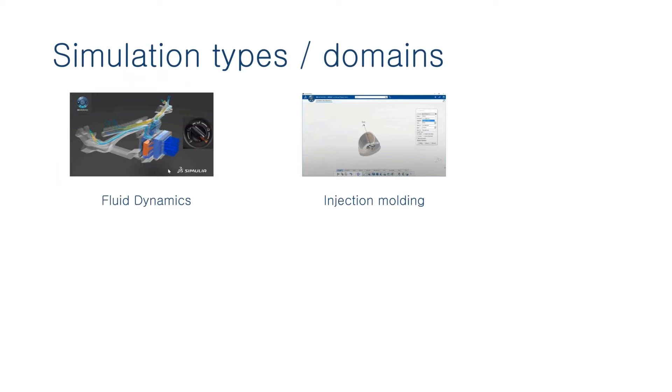We have fluid dynamics. When we want to have access to our fluid flow, we need to know pressures, velocity of the fluid, thermal effects. We have as well injection molding. In this case, instead of analyzing the product, we're analyzing the manufacturing process. In this injection molding, we are able to analyze the fill stage, packing, warping, and the mold cooling side of things.

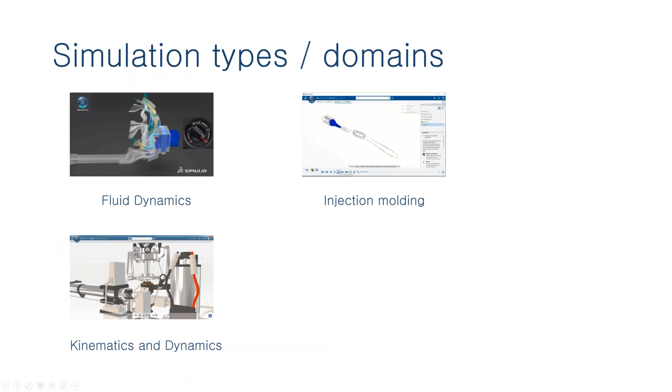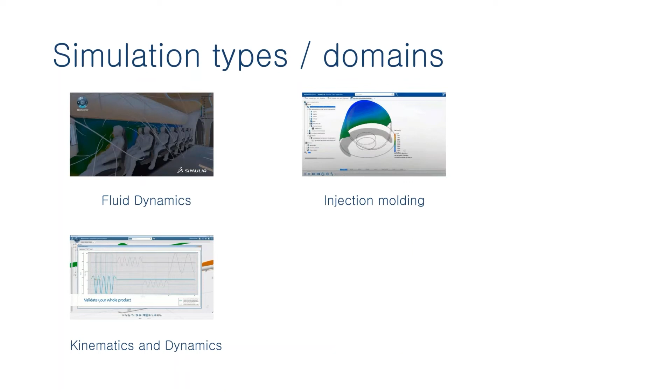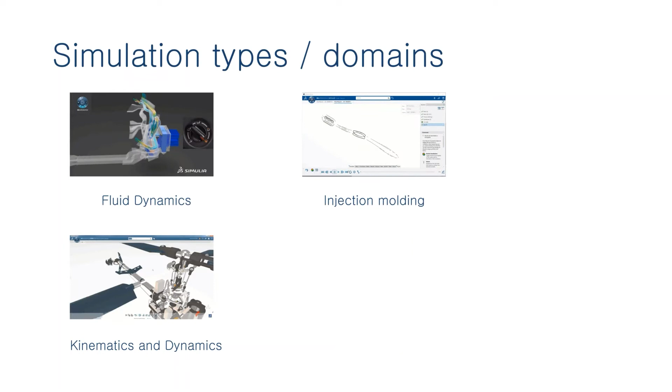For some other people, simulation may mean kinematics and dynamics of rigid bodies. So when you're looking at adding some kind of motors, you have products that have a lot of movement, and you need to analyze that. Kinematics will take a look at the velocity, acceleration, displacement of those rigid bodies, and then dynamics will add to that forces and pressures based on that movement.

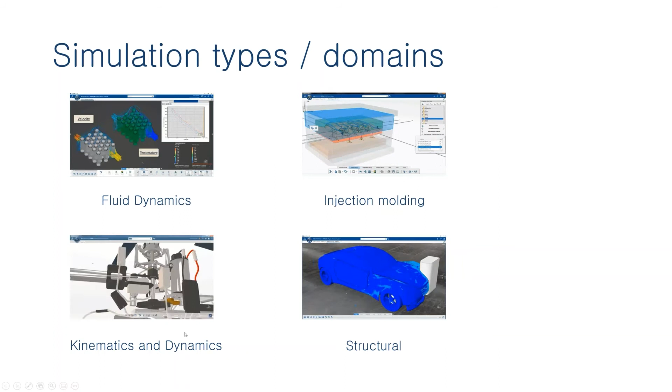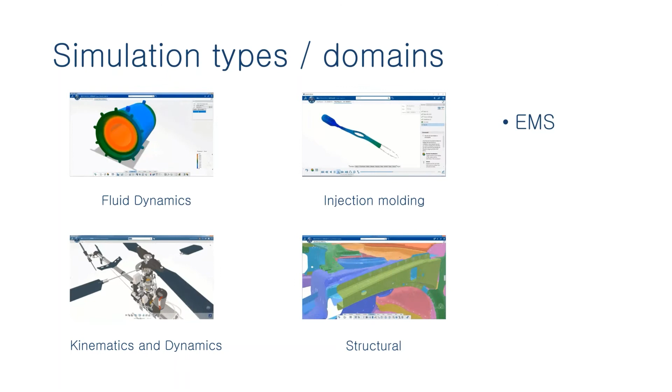And then we also have the structural. The structural is when we're looking at the stresses, the strains, deflections, the fatigue, drop test, all of these types of analysis, we put them under the structural vertical. And then on top of that, a simulation may mean more for other people. So for example, electromagnetic simulation, when we need to know a magnetic field, an electric field, based on a current.

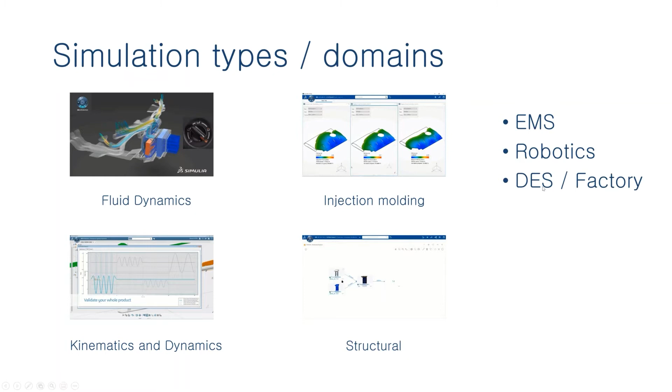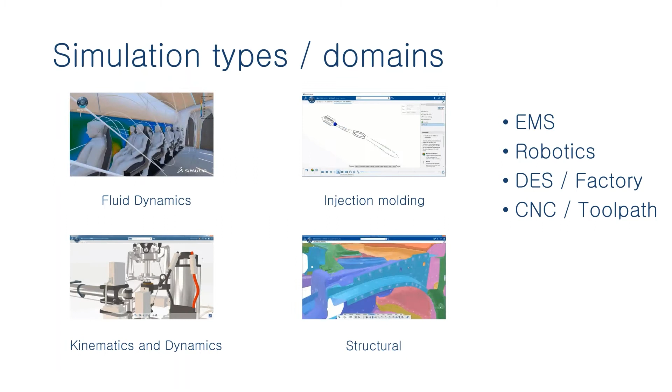We can do that. For some other people, robotic simulation is what they need to get out of the solution tools that they have. Discrete event simulation and factory simulation as well. We have CNC and tool path and optimization of those type of things that may be considered by some other people as simulation as well. We have virtual reality and augmented reality. Again, some people will consider that as simulation.

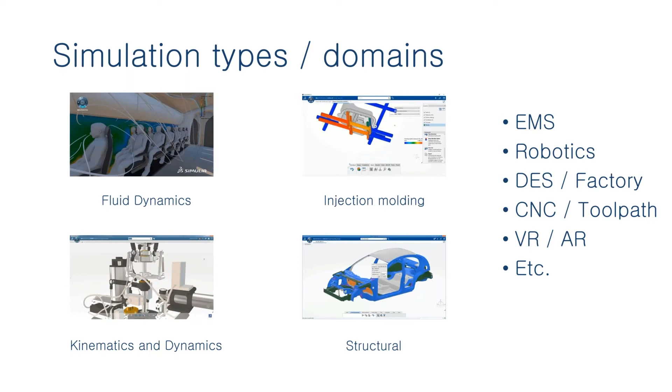And then there are a lot of other products. We within CAD Micro, within the partnerships that we have, have solutions for all of these products. And a lot of these solutions are within the 3D Experience platform. There are also solutions in our installed SOLIDWORKS platform, as well as some other partner products that we partner with. But today we're going to be talking about the structural.

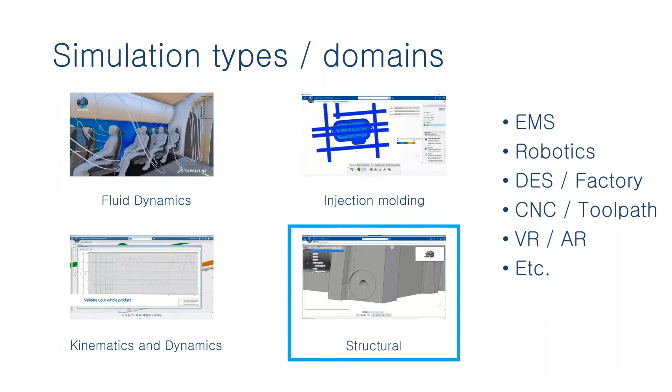Structural is probably what people think about when people talk about simulation. The structural domain, the structural vertical, is probably the first thing that comes to mind. We're going to be talking about the structural because it's not only the most common one that people would do, sometimes it is the first type of simulation that people get into,

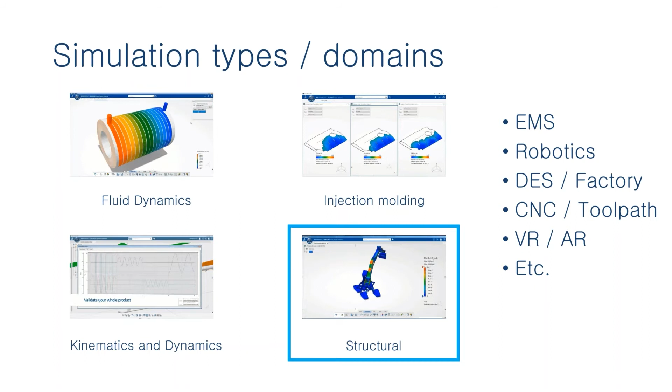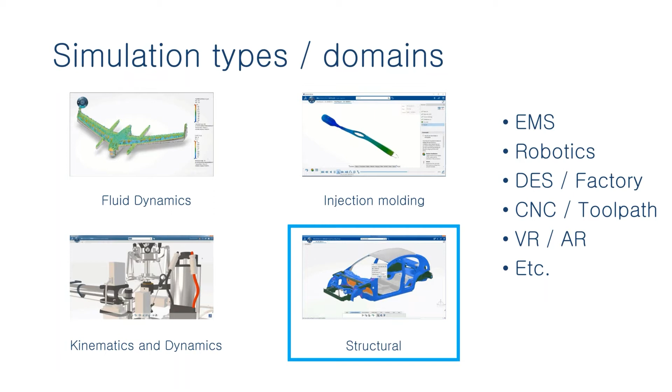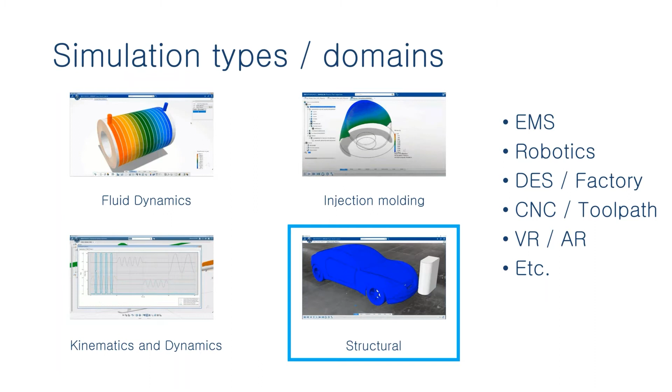but also because a lot of the things that I'm going to be talking about related to the structural simulation, like meshing, like collaboration within SOLIDWORKS and the 3D Experience platform, would apply to these other domains. So for today, I'm going to be concentrating on structural. If I'm talking about things that we cannot do, it's just within the structural domain, but chances are we can do it within the different domains that we have.

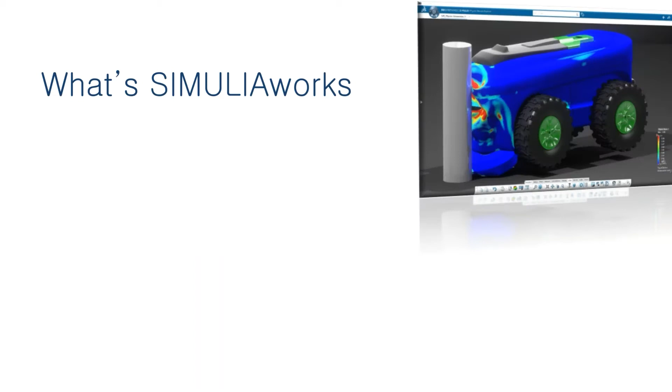So that is the simulation that we're going to be talking about: structural. And now we're going to look at what SIMULIAworks is and how it is going to help me within that structural vertical. So SIMULIAworks is a brand, and it's a brand that contains a portfolio of simulation products. There are several characteristics common throughout them. The three that I want to highlight today are that it is a SOLIDWORKS connected product.

It doesn't require you to have SOLIDWORKS, but based on the poll that we did when people were subscribing to this webinar, based on our customer base and the people that are joining today, most of you do have SOLIDWORKS. So I'm going to concentrate today on SOLIDWORKS, not because it's the only workflow that we have, but it's the one that I am more familiar with, and our audience is more familiar with. So this SOLIDWORKS connection is very important.

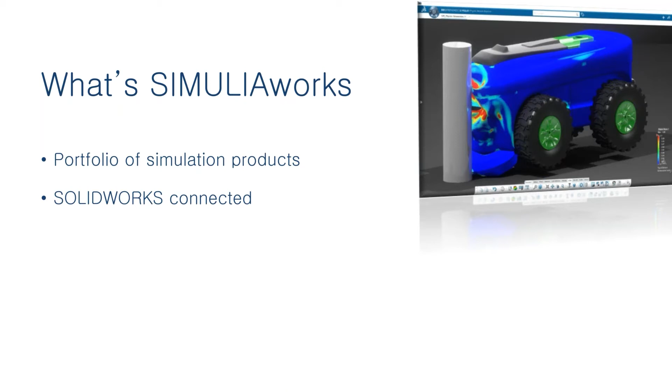There are other connections, like I said, you could have a connection with CATIA, a connection with Autodesk Inventor. You don't even have to have a CAD system to be able to use these. You could have a modeling system within the platform as well. But again, today we're going to highlight the SOLIDWORKS connected portion of it. We're also going to be talking about the collaboration within the 3D Experience.

Once we have this geometry in the 3D Experience, there is a big room of possibilities that we can leverage in that platform. There is data management, there is PLM, bill of materials, there are collaboration tools. The 3D Experience is a whole platform that will give us the different tools that can help with the process that we're working on.

And then the third characteristic that I want to highlight about the SIMULIAworks portfolio of products is the power that it has. It's such a powerful tool. It is powered by the Abaqus solvers, which are very well recognized in structural simulation. And when I'm talking about powered by Abaqus, I'm talking about the structural side of the SIMULIAworks brand. And this brings a lot of technology that is proven and recognized in the industry.

The first three items, the portfolio of products, the SOLIDWORKS connection, and the collaboration, I'm going to do a brief overview of them. We could have, and we will have, webinars on each of those subjects, but today I want to spend a little more time on the technical aspect of the FEA process, a little bit more in detail.

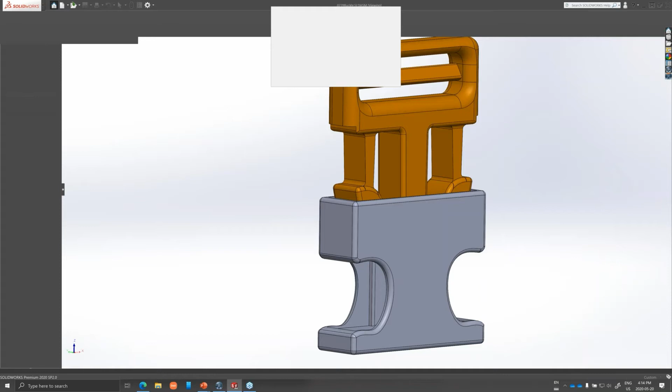So let me show you that actually in the interface. So I have SOLIDWORKS right here. I'm going to open an assembly. And let's say that the assembly that I'm going to open is this one. In this case, this is just a basic assembly, a couple of parts. You see here, this right now is on my desktop, in my local drive, and I want to move this to the platform.

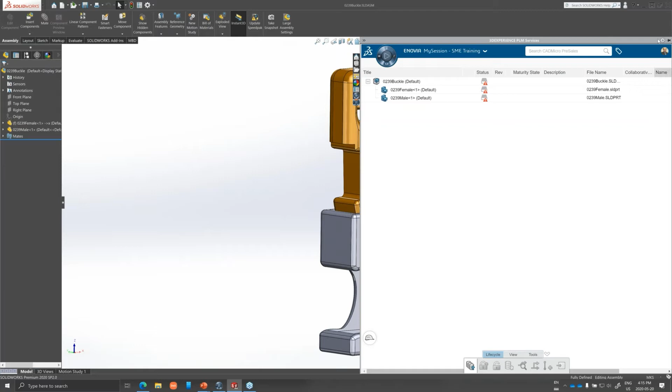So what I have here is an add-in that is called the PLM services add-in. And when I do that, similar to what we have in PDM, it would recognize that these files that I have are not added to PDM. They're not in my local view. This is what this warning is telling me. These files are not in my local view of the PLM services.

So when I click on this and I go to save, the first thing that it's going to do for me is create this type of work. And then you can see here that it already finds some of the files. I'm still going to go ahead and copy this into the platform. Let me just skip that and then add that to the platform. I had done this before, so let me just open this one. There you go.

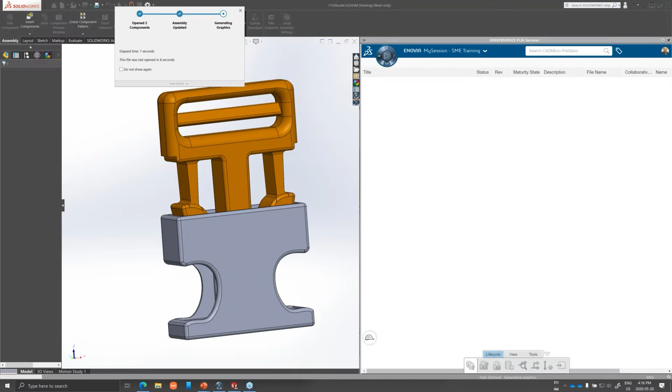Once we have it in here, you'll see that it'll recognize that I'm on that platform, and then I have similar functionality as PDM, or it is a PDM package. So if I want to work on this, I'm going to right click on that. I can reserve this. Once I reserve this, I'm going to be able to work on it. I have write access to it, and have general PDM functionality in here.

Now, within this tool, I can also link to some of those collaboration opportunities that we have within the 3DEXPERIENCE. So for example, in here, if I want to look at my change management, let's say that there were a series of issues that were tracked. This can be done in the platform, and then a change was issued, like an engineering change order was issued. I can take a look at those here. And to do that, I can look at my roles.

So if I click on my roles, I'm going to open an app called a change action. If I click on that action, you'll see it's loading the different work we have in those change actions. So here it's highlighting that this object is not attached to a change right now. But it says I have two change orders open for me. So I can use one of these change orders and track the changes I'm making to this geometry.

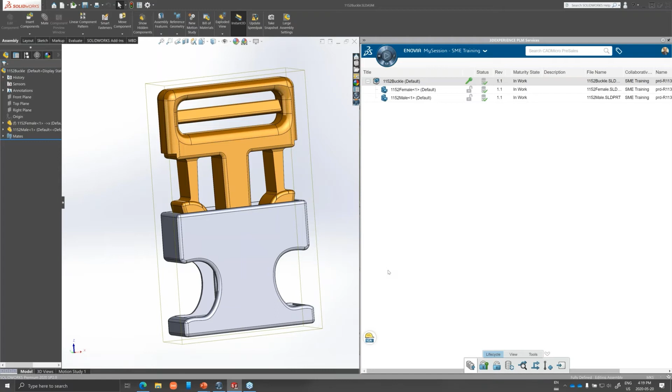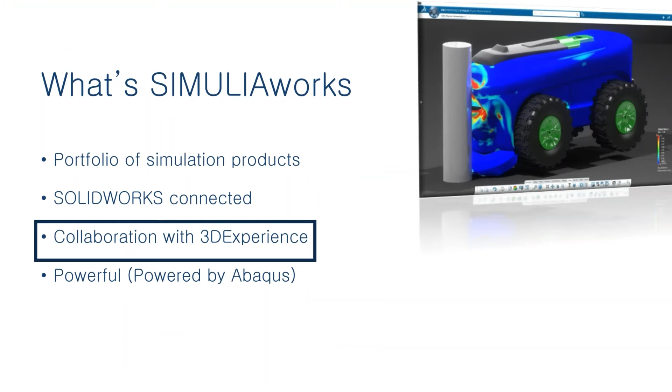So we've done this, and now we're going to go into the collaboration portion of it. You saw a little bit of that collaboration inside the SOLIDWORKS platform and interface, but we can also obviously do that in our web browser.

So right here I'm on a web browser. I'm connected and logged into the platform, and the way I'm organizing my information is based on what we call a dashboard. So I created a dashboard that contains the information relevant to me. And in here I have some bookmarks, which is a way of organizing the information and content that you have.

I also have a project planning app. I have, for example, a project that I created to plan this webinar. I have some tasks I need to do, some in progress, some done, and there's kind of a project planning functionality within the platform.

Then I also have a 3D space, which is kind of a set of files, all my information is in here. Think of it as a drive that we have, and I have access to all of that information in there.

And then I have here as well my issue management. So I have an issue that is tracked against a geometry and against a product, right? So there is issue management and issue tracking. And in this case, the scenario we're going to work on, there is an issue I've created that refers to a product, that buckle assembly we're going to analyze.

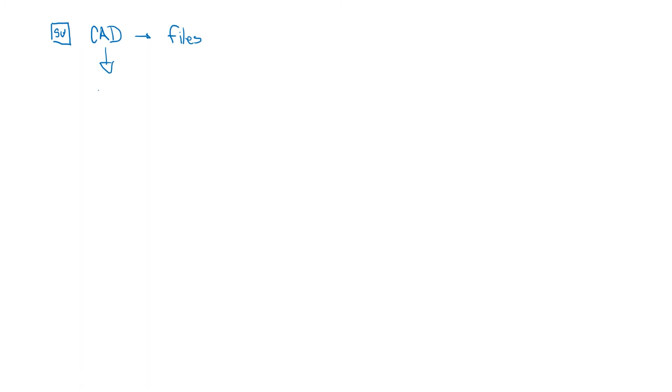It is a bunch of files, a file-based system. So we have that. Now, what I just did at the beginning of this presentation is that I uploaded that to the platform. To upload that to the platform, in that process, we end up with what is called a physical product. So that information stored in my files, in my local folder or in PDM or wherever it is, that information in the file format becomes what we call a physical product.

And this physical product is not a file, it's an object-based system. This object-based system is essentially just a record in a database, which makes it very flexible and very useful later on. But it is a 3D representation, a fully functional 3D representation.

Now I have that physical product. I can use that just to view, to annotate, to have my digital twin and do MBD type functionality. There's a whole set of tools that I have in there.

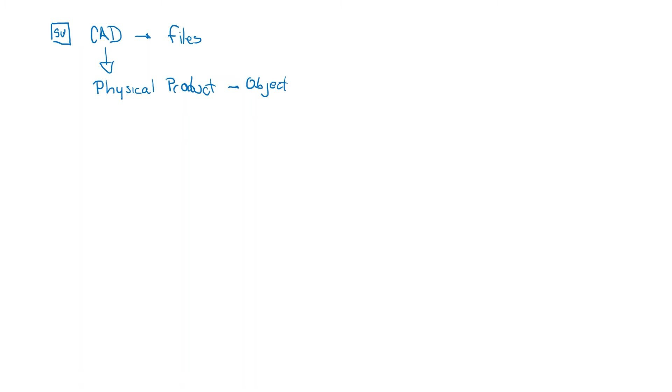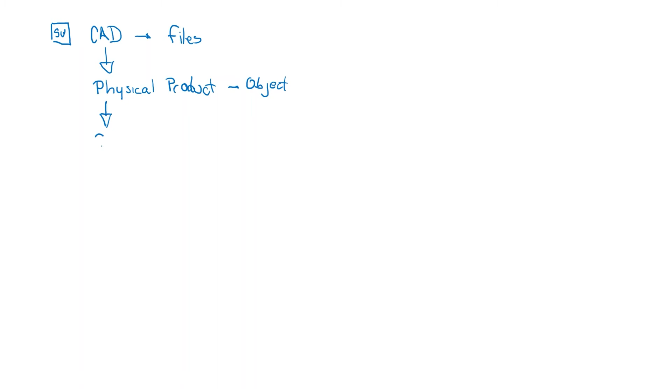But for the example of today, we're gonna grab that physical product and create a simulation. So when we create a simulation, now we have our simulation model. This simulation model is a different entity within our database, within our records. And then in this simulation model, this is where we're gonna set up the simulation, run and create different scenarios, and measure and everything else.

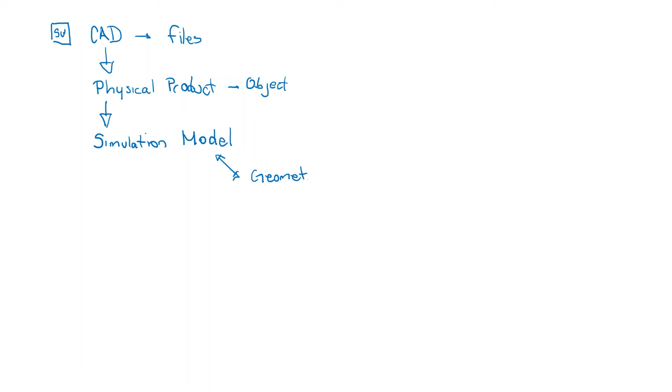Now in this simulation model, I also have the ability of making geometry changes. So if I have a simulation model in here, within our native app, we can make these geometry changes for the purpose of the simulation. This is important because now I'm making these changes in a tool dedicated to making changes for simulation. It has simplification, idealization, planes and boundary conditions, geometry that's already there.

So it makes it easier for me, but it's also making those changes into this simulation model, which is a different entity. Just to compare this to the typical process we use with PDM and SOLIDWORKS models: for me to do that simulation, typically either I have to do the simulation on the CAD files, or I'd have to create a copy of the CAD files to make that simulation. If I want to alter that geometry, I'm using CAD modeling tools that are very good within SOLIDWORKS, but maybe not optimized to make geometry changes for the purpose of an FEA study.

And also, I need to have ownership rights. If I'm working in a PDM environment, if I'm setting up a simulation, then I'm working on that file, so I have to have ownership of that file, and then nobody else can be working on it. And I may potentially be modifying or adding all of these geometry changes to a file that is not intended to do that—it's intended for manufacturing purposes.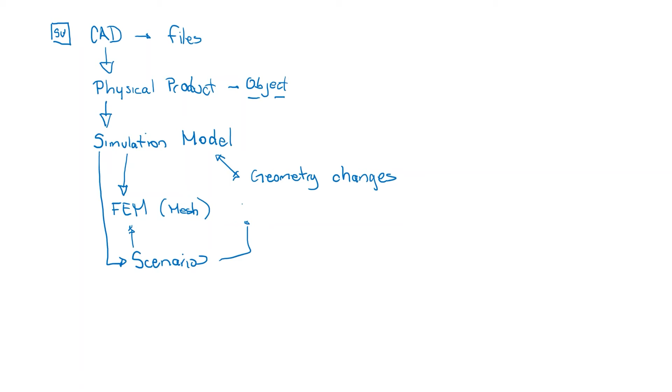All of these are different entities, even though they're separated, because it's not a file-based system but an object-based system, so it's very easy for me to mix and match. If I have a scenario looking at this FEM model, I can reattach it to another model, a second interpretation of that simulation model. But it's a fully parametric setup.

So if I make changes to my CAD geometry, I can say, okay, update all of these physical product simulation models, the mesh, and then run the scenario based on the changes to that CAD geometry. Let me show you that in the interface.

So in the interface, you can see here on the right, this is how you would see that, and this is the design tree on that app. You can see that we have the geometry, but then we have this idealized geometry. So there's the geometry, the physical model or physical product, then this idealized geometry. And from that geometry, we have the mesh, and on the mesh we have the material properties, and then the different simulation scenarios underneath.

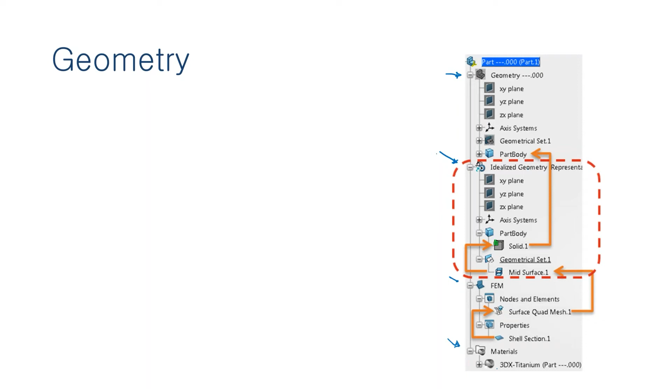Let me show you that in the actual interface. This is what we call the native interface. It essentially looks like a very empty or clear browser. I have different tabs in here, and one of the tabs is where I'm running that simulation, or where I have run that simulation.

You can see, again similar to what I described before, I have my physical model in there. Within that physical model, I didn't make any changes to the geometry here. It was simple enough that I used the geometry as it came from SOLIDWORKS, so I don't have an extra step of idealizing that geometry, but I do have the finite element model. And then I have the material attached to it, and the scenario I've done, which is the actual simulation, and the result for each of the scenarios created.

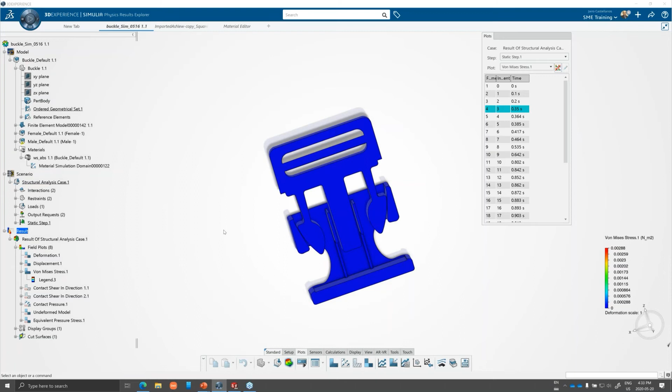So that is the tool, that's how it looks. Now, if I'm looking at this simulation, I have a view of that relationship in here as well.

So if I go to my new tab and look for that part, that assembly that is my buckle, you see that it searches the system for it. It gives me access to all the different things that have buckle in their name. You can see that I have different types or different tags I can add, and then filter those search results based on that. So I can see very quickly that I have that simulation.

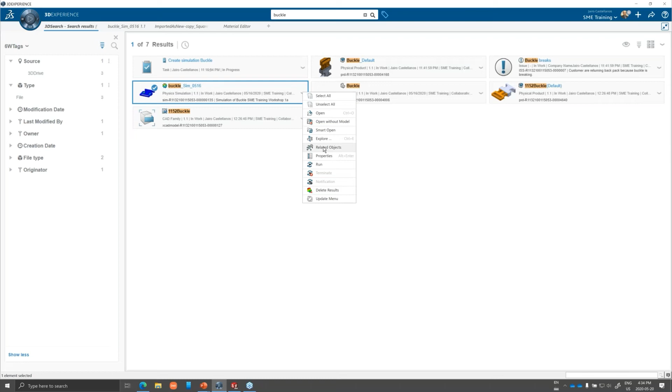And if I click on this, I'm going to show you this related object view of what I'm talking about. So I found the simulation, I opened it in the related object view, and then you can see here, oh, I have a simulation, and this simulation is simulating this physical product.

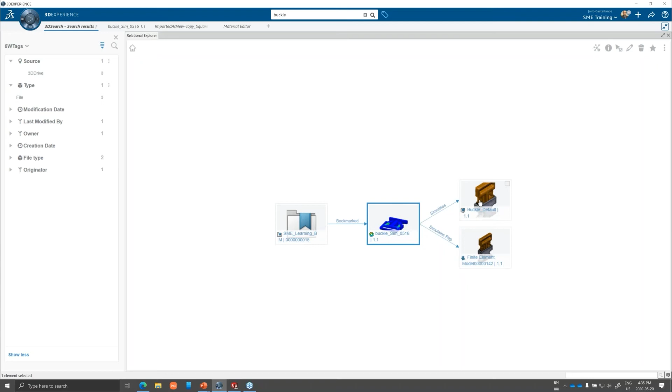That simulation is using this kind of finite element model, right? I'm tagging this on this bookmark that I had in my platform. If I click, for example, in here, then you see that I can expand the relationships farther on. And if that physical model that I had is looking at a specific material, it is also in the same bookmark that I'm using, and is also attached to an issue. And this is the issue that I was talking about. So you can see very graphically, you can go through the relationships of all of these different objects and kind of work with them.

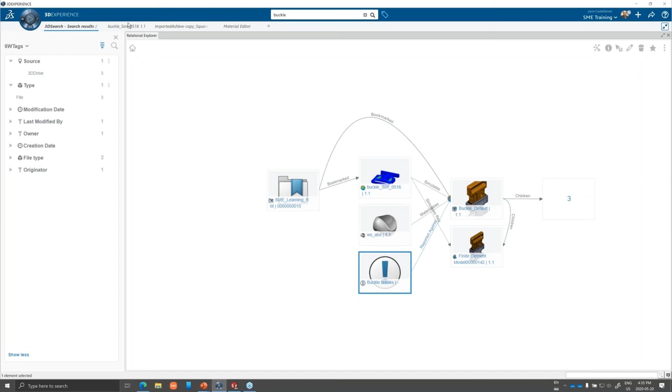So that is kind of step number one, dealing with the geometry, looking at what we can do in that geometry, and then kind of storing that geometry in the platform. Step number 2 would be assigning the material. And when we're talking about the material, then we're talking about two different things. We're talking about material properties, and we're talking about material models.

So there are different types of material models that we have access to. And just to give you an idea, in SOLIDWORKS Simulation Premium, we have the ability to have different material models. One of them would be the linear elastic material models. Under that linear elastic, we have two options: linear elastic, orthotropic, or isotropic. In the platform, based on the SIMULIAworks product, only within the linear elastic we would have 6 different implementations of that, and it will let me create different types of definition for that linear elastic.

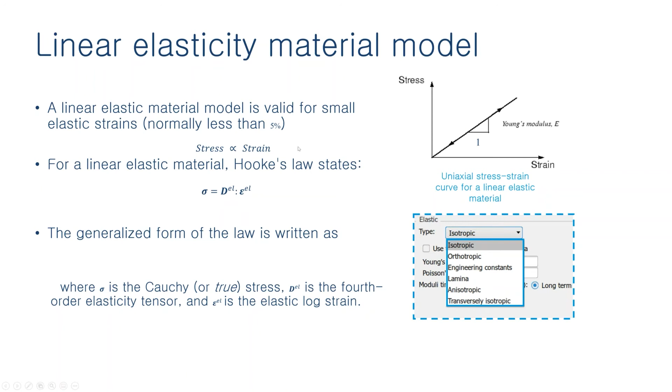So for example, the isotropic is when all the behavior is the same in all directions. Orthotropic is when the behavior is different in the X, Y, and Z directions. Engineering constant is another way of defining an orthotropic material. Lamina would be a material model where we have a plane where it's isotropic, but then a different material behavior perpendicular to that. And anisotropic is when it is linear, has different behavior in different directions, but it doesn't necessarily have to be in the X, Y, and Z, and so forth. So different ways of implementing this.

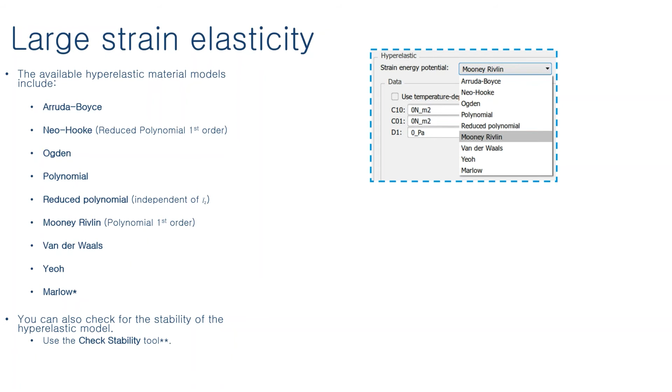So beyond linear elastic, we also have large strain elasticity material models in there. And again, this is just one set of implementations of the different material models. So for these hyperelastic materials, if we were to compare these to our SOLIDWORKS Simulation Premium, we have the Mooney-Rivlin in there. We have the Ogden, and that's basically it for hyperelastic materials. In here, we have a lot more functionality, a lot more material models. So the linear elastic and the hyperelastic materials are just two of the different material models that we have access to.

I'm not going to go through all of them, but we do have in one central database the ability to define the different sets of material models for the different domains of simulation, which makes it very practical. In the same database, I have the materials and the material models for my structural side of things, but also for my injection molding, also for my fluid. And that being in the same platform helps me if I ever want to do a coupled set of analyses. And it helps me manage those materials as well in here.

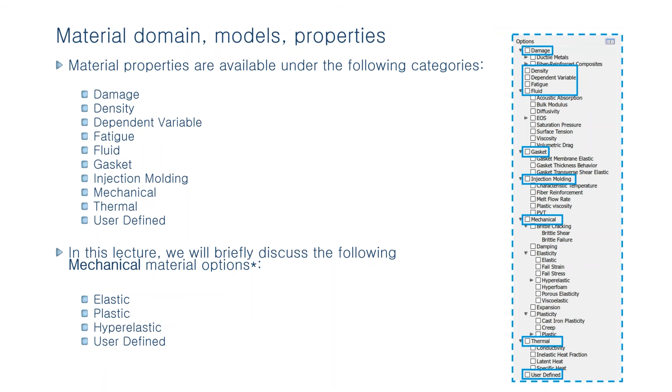In terms of the structural, we have elastic, plastic, hyperelastic, and user-defined material models, and I guess you could look at thermal material models as well with the structural side of things. Those are the main ones, and all of these can be either linear or non-linear. And then they can also have temperature-based properties. So let's take a look at that in the interface.

So if I go, for example, to, let me just close this relationship explorer in here. I'm going to go to my material editor, and let me show you how that looks in the interface. If I wanted to create a material, I would give it a new name, new material here. And we have the core material, which is the full solid material, but also covering materials in here. And then under my domains, I can select my simulation domain.

It's the same database that I could use for rendering, like appearance materials. And this is what we call the appearance domain, or the drafting domain, so hatching and all of that in a 2D drawing. But in this case, we're just thinking in simulation terms. So if I click on that, you see that it would create these materials, and then we can look at the material properties of this simulation. And then we could define that material based on the different values that we have.

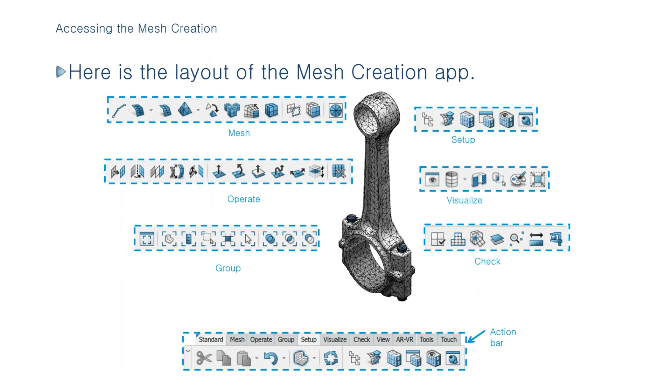The next thing that we would do in our simulation is meshing. There is a dedicated mesh tool that we have within the SIMULIAworks platform, and we have a different approach. I'm comparing this to our SolidWorks Simulation. When we mesh something in SolidWorks Simulation, we're meshing the assembly, and that is one methodology: within that assembly, we look at what we have and we mesh that, but that mesh lives in the environment of that assembly and of that simulation.

And here, as you saw at the beginning, we can have different mesh elements. And these mesh elements I can create at the part level, at the subassembly level, at the main assembly level, and they can be reused. So these finite element models that I was talking about before become almost like a block that I can enter into bigger simulations. So it's a different approach that we don't have right now in SolidWorks Simulation, but it makes it more flexible. You can customize, you can target, you can create a simulation and fine tune the mesh for that object, and then reuse that in main assemblies and sub-assemblies as well.

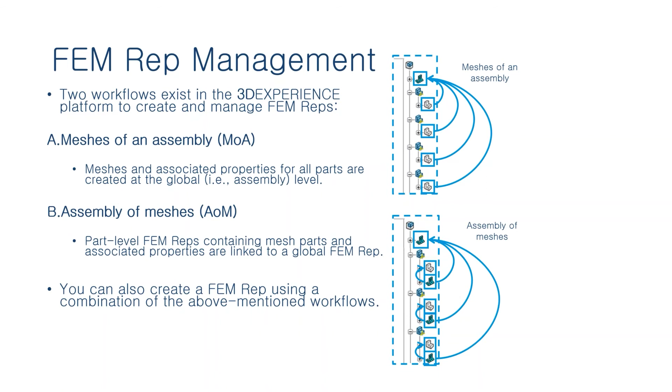So not only the approach to meshing is different, but also the type of elements that we have is different. Again, I'm comparing this to our SolidWorks Simulation product because that's the one I'm most familiar with, but you can compare it to any other simulation tool that you have. Typically you would have 1D, 2D, and 3D elements. And in the SolidWorks portfolio, 2Ds are triangular, and 3Ds are tetrahedron, or TET elements.

In here, we have access, obviously, to those, but also to other types of elements. So we have the swept 3D and we have the hex, and different algorithms or different ways of using those types of elements. Just to give you an idea of what the difference is, the hex or brick elements are a very powerful type of element.

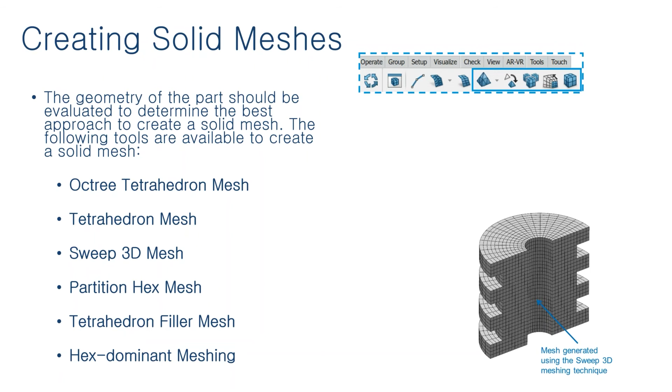The implementation is more robust. It can run faster, and if I wanted to mesh using tetrahedral elements within that hex mesh, I need kind of a 4-to-1 ratio of the amount of elements with the same characteristics for one hex element. So four tetrahedra for one hex, and that makes it faster to solve. So not only is it more powerful, but it also is faster to run.

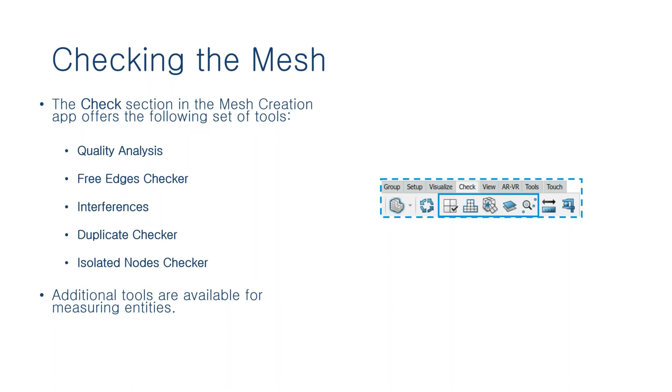So the ability to have different types of meshes and mesh elements makes the software more powerful. And the same would apply to 2D element surface meshes and 1D elements. We also have tools that help us create and analyze the mesh itself, and then we have tools that help us visualize that mesh.

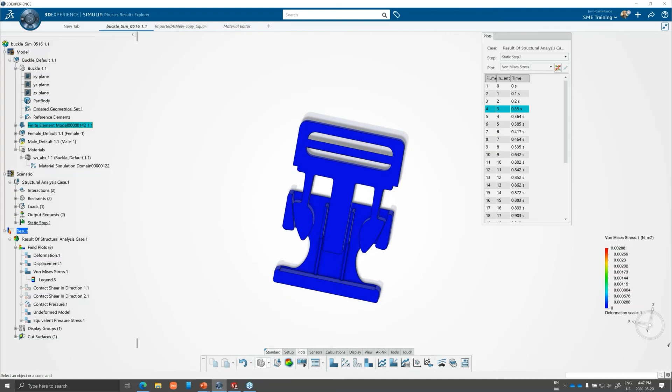In here, this is the mesh that we have. You can see that we have the finite element mesh in there. I can change to that mesh environment, and then it would show me the mesh. The way that this was done, I'm using tetrahedral elements in here, and I did a mesh control, you can see in this area. So different types of elements and meshes that you can create within the platform.

As I am clicking on these icons, you see that my toolbar changes, but also my environment changes. If you see in the top here, I'm in my mesh creation environment. So these are what we call different apps. It's within the same interface. So it's not that I'm closing this and opening a different program. The different apps within the roles in SIMULIAworks are just different environments that we have access to within the same interface or platform.

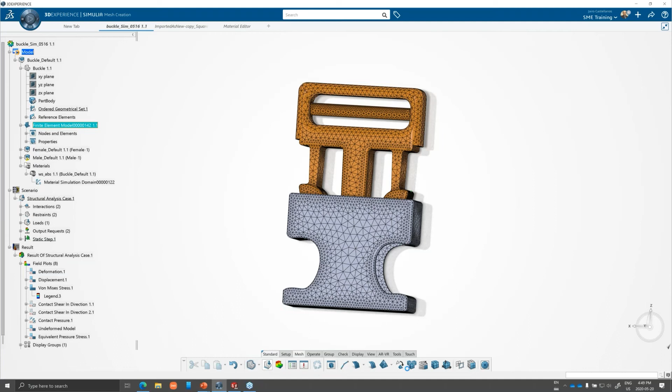When I'm in that environment, in this case mesh creation, all the tools, all the menus, everything that I do here is specific to that environment. And then if I go, for example, to my scenario one, you see that now this is going to be changing to the scenario, right? Mechanical scenario creation. So different tools, as well as the result one in here.

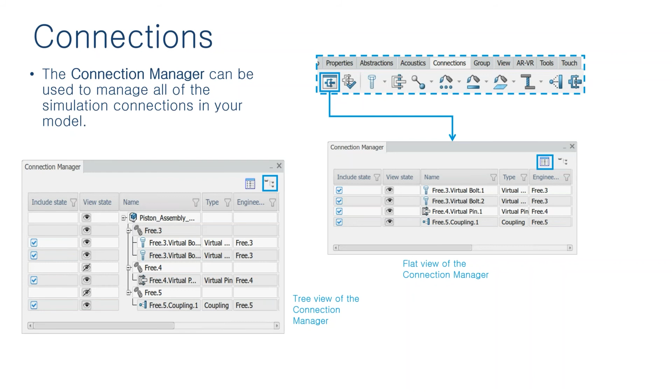So let's continue. So that is the meshing. Then we also have connections. There is a set of connections in here similar to what we have in SOLIDWORKS Simulation: bolt connectors, pin connectors, all of these types of things are available here. They're more powerful in the platform. You're able to use these types of tools in nonlinear dynamics and all types of simulation as well.

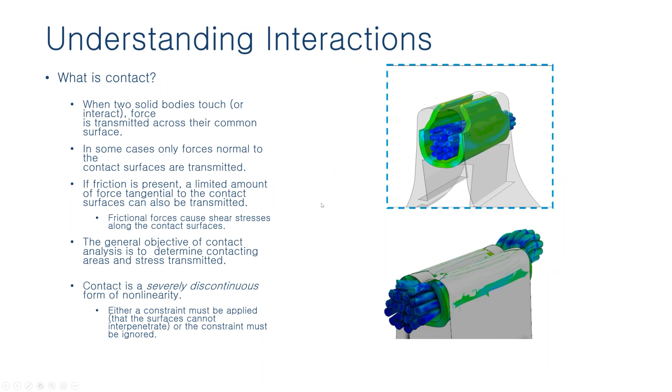But one of the main differentiators of what we can do in here compared to other tools is the contacts, the global contacts. A simulation like this would be very difficult to do, or you wouldn't necessarily be able to do it in SOLIDWORKS Simulation Premium. The amount of contacts that you would have in here would be very difficult to set, because the way we set those contacts in an efficient manner in SOLIDWORKS Simulation is that we need to create these contact pairs.

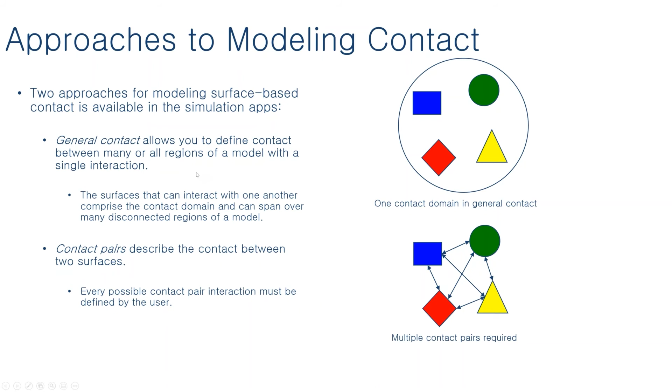We have a global contact, but there is a penalty in terms of computational effort when we use it. That's not the case in here. There is a very, very efficient global contact or general contact in here that actually lets you use it and run your simulation, which is what I've done in here.

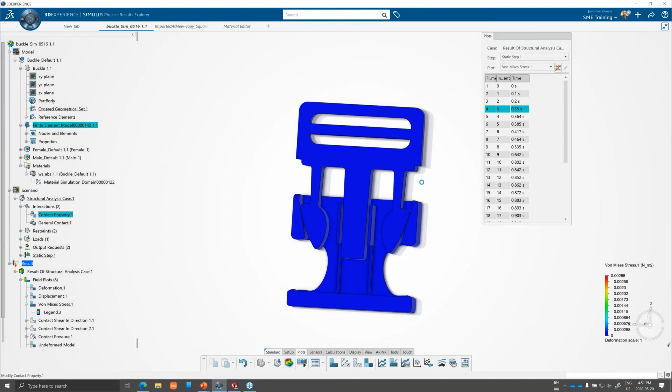In terms of these interactions or contacts, I added those interactions, that general contact, and the general contact that I have is looking at these properties in here. So if I edit that, you see that I'm doing a global no penetration, normal behavior hard contact in there. And then I'm reusing that in the general contact. So I can set different contact properties and then reuse them in the general contact or in contact pairs.

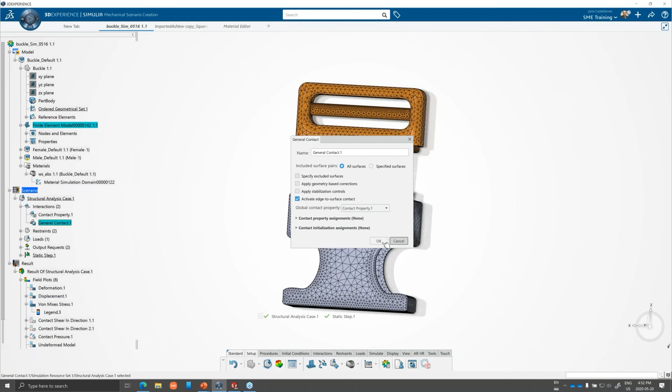Actually, let's go back to here. In terms of the boundary conditions step, in here I'm also adding some restraints, very typical restraints. I'm restraining at the bottom here, and then I'm adding a load. My load is just a prescribed displacement at the top. I'm pushing this down, as you see here, 18 millimeters down in this direction.

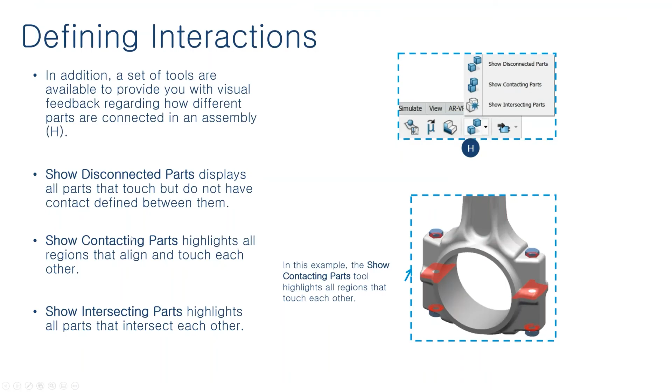And then once I have that, then I'm ready to solve. So to solve in here, it's important to talk about all the different things that we can solve. In my case, it's a nonlinear implicit analysis that I'm doing. It's not a dynamic analysis. I don't need a full dynamic in here because I'm not looking at the inertia effects, but it's a quasi-static, and I'm actually using an implicit solver to do that.

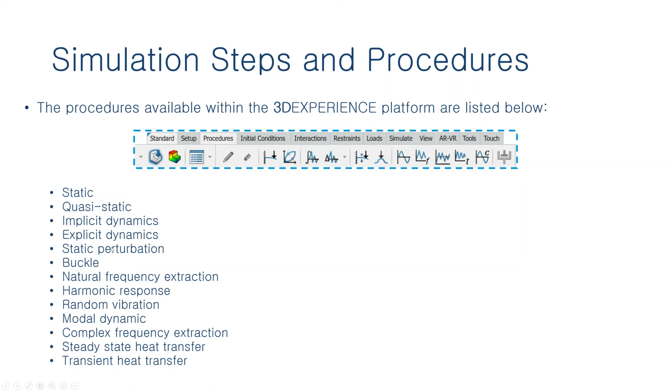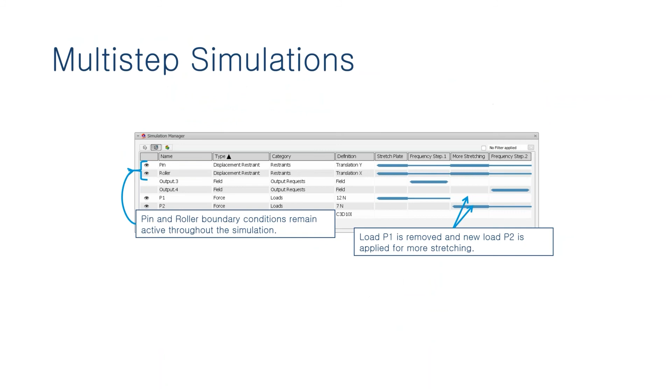But there are a lot of different types of analysis that I can create and run. And you will be familiar with some of these as part of Simulation Premium, if that's what you're using. The important thing here is that we have a different type of solver, this explicit dynamics. And that different type of solver helps me create and run very computationally heavy applications. So before I talk about solving in the cloud, I want to talk about that type of solver. We have an implicit solver and an explicit solver.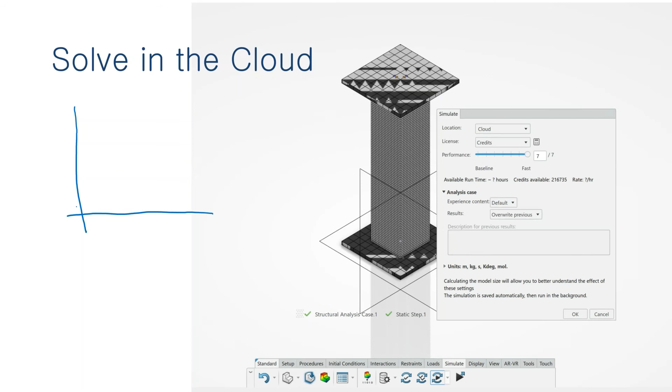When I'm looking at an implicit solver, to solve anything, I have to calculate the stiffness of my entire structure to be able to solve it. And then I solve everything concurrently. Depending on the number of degrees of freedom that I have, it looks something like this. It scales up very quickly. So the more degrees of freedom that I have, the more computational effort, or I'm going to call it just the time to solve, it's going to take.

What happens with the explicit solver is that it doesn't solve the entire structure. It uses the wave propagation method to be able to do that. So if this is the implicit solver, then we also have an explicit solver. And this uses the wave propagation method, which means that it just solves in the area of disturbance. And then it calculates how that disturbance is propagated through the model, and then it solves one step ahead of that.

The advantage of this is that for a lot of degrees of freedom or a lot of iterations, so a lot of quick times, so impact loads, it becomes a lot more efficient than the implicit solver. We're going to have a full webinar to talk about these implicit and explicit solvers, the background between them and what we can do with each of them. But it's important to highlight that this is one of the main differences between this type of simulation tool and other simulation tools. There is the very high-end explicit solver that Abaqus is known for, the Abaqus Explicit.

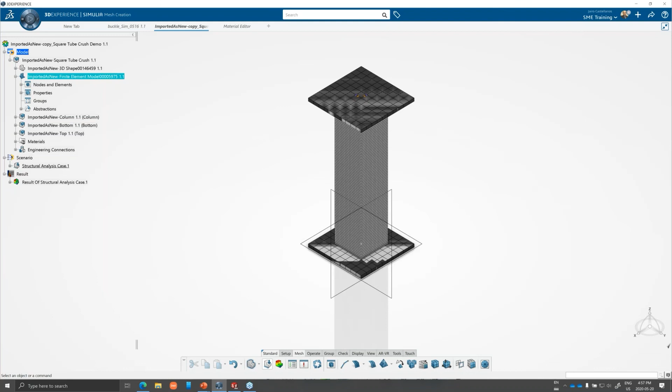And then because we're connected to the cloud, we have the ability to run these simulations in the cloud or run these simulations locally. So if I want to offload that, I can offload these in the cloud. I can use up to 32 cores and have cloud computational resources solve that, but I could also solve that locally as well. So let me show you that. I have a simulation set up in here. Let me just go to my simulation scenario. And then if I click on simulate, you see that it gives me that option, that I can do either a cloud simulation or a local simulation.

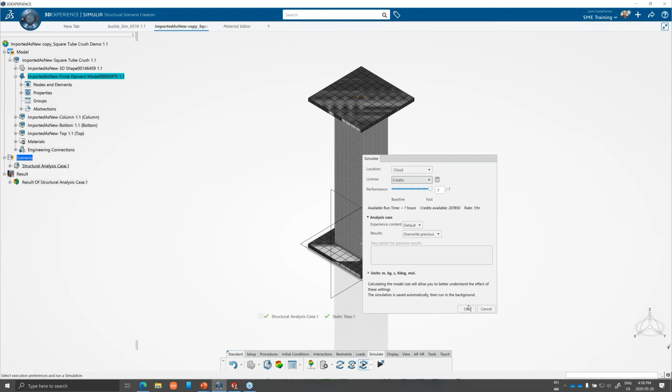So if I'm doing a local simulation, I will be able to select up to 4 cores that I have access to, or if I do it in the cloud and I use my credits, then I will be able to use more cores. And like I said, in here the administration imposed a limit on how many cores, but I have up to 32 cores that I could access in there. And then if I say okay to this, then this is going to be running in the cloud. But like I said, you can also run it locally.

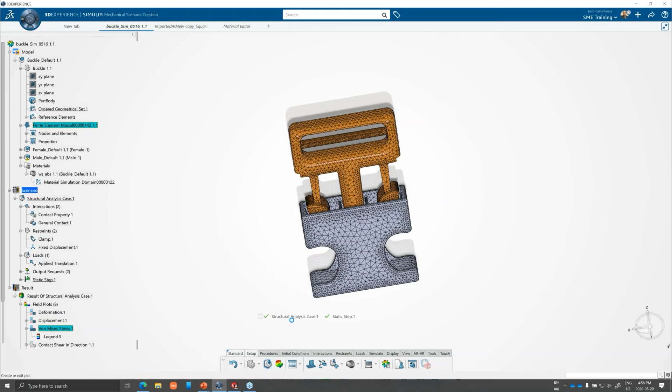This simulation that I have in here, I have already run. So I already have my results, and I can show you that. I'm just loading those in here, and you can see what I have. So in this case, again, this is the von Mises plot of the different steps of the simulation. The post-processing of the results actually takes me to my last step, that is my results. And in here I can animate, I can create reports out of it, I can do all the post-processing. Again, this Physics Results Explorer is a specific tool dedicated to post-process and analyze my simulations.

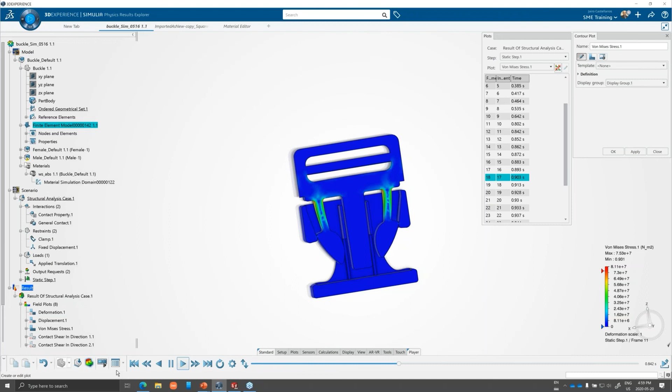And then to compound that, we could have several non-linearities, but we have a dynamic problem where we have a lot of degrees of freedom or a very quick response needed. So the time steps that we have to select are very small. And for that, we have the explicit solver.

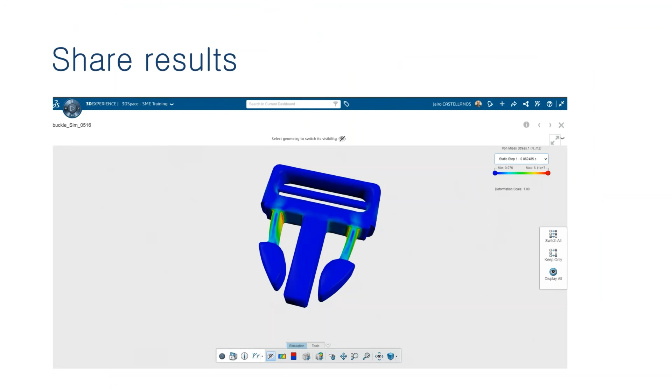And then we also have the ability to look at these results. Obviously, we could export results, but we could also have them within the platform. So I'm back on my browser. This is the dashboard that I was looking at before. And because I'm doing everything in the platform, I have that ability embedded to look at these types of results within my information in here, right?

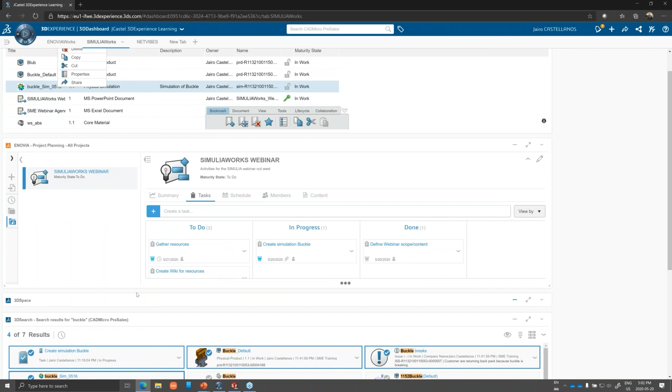So if you see, for example, here, if I put it in my 3D search there, and if I expand that, then I am able to look at these results in the cloud. Oh, I have it open somewhere else. Okay. There you go. And then let's go back in here. So this is my result in that website or web interface.

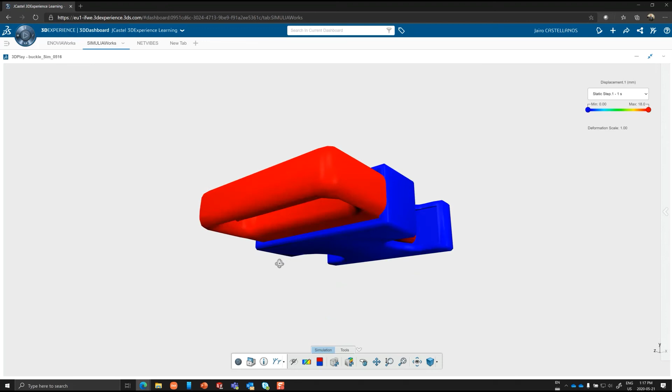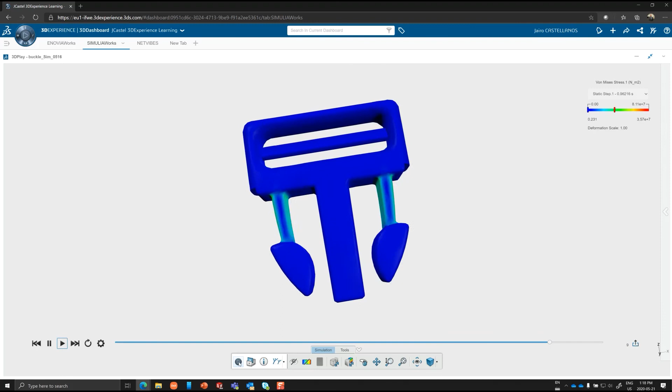So just to conclude, I'm getting a little bit longer. We have a system that is accessible, that is powerful, and that is connected. It has the ability to work with your SOLIDWORKS simulation geometry, use SOLIDWORKS as your CAD model. It has the powerful engine that is Abaqus and is connected to the 3DEXPERIENCE platform, and is able to use what is called HPC, high performance computing in the cloud, to solve these types of simulations.

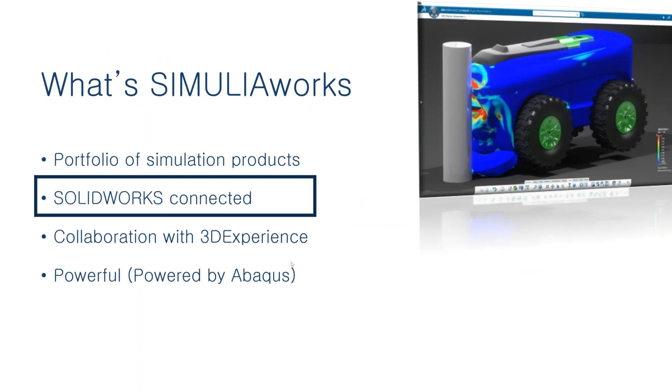So we still have a lot of functionality in this role, especially the performance engineer and the mechanics engineer role, that goes beyond what we can do in our SOLIDWORKS Simulation products. Okay, great. There's another question that stems off of that one. Do you have any comparison data between SOLIDWORKS Premium and SIMULIAworks, and the test data results in accuracy, time spent, etc.? Yes.

The way all of these FEA softwares work is that you test them against a benchmark, and two of the most common benchmarks available are NAFEMS, the National Agency for Finite Element Methods and Standards benchmark, and then AFNOR, which is the French version of that. We have data on both that would compare the results that you get with any FEA tool, in this case the SIMULIAworks FEA tool, compared to either the empirical testing or the known analytical result.

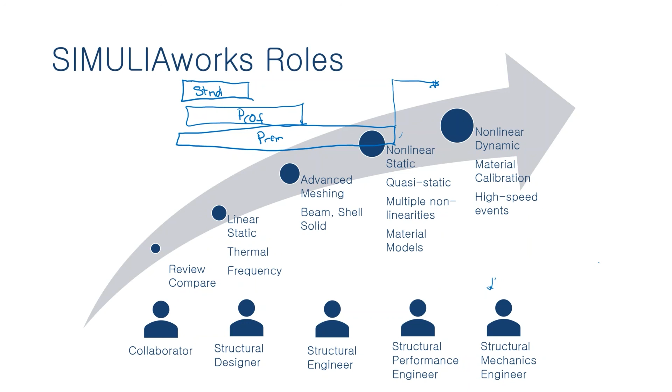And the last question, unless more come in: what happens if the internet fails? So if you see here, we are connected to the platform. I'm running this native app, which is actually kind of an installed product, just connected to the app. So do I need to be connected to the internet to work in this?

You are going to want to be connected to the internet, but if the connection fails, you can always save under save here. You see we have the ability, if I click on the general save, to save locally. You can still work if the connection drops, but ideally you want to be connected. It's not different from our installed PDM system - if you're not connected to the vault, you don't have that search functionality or the extra functionality of PDM, but you still can work. So let me click on the right button here - we have the local save, and we can do that.